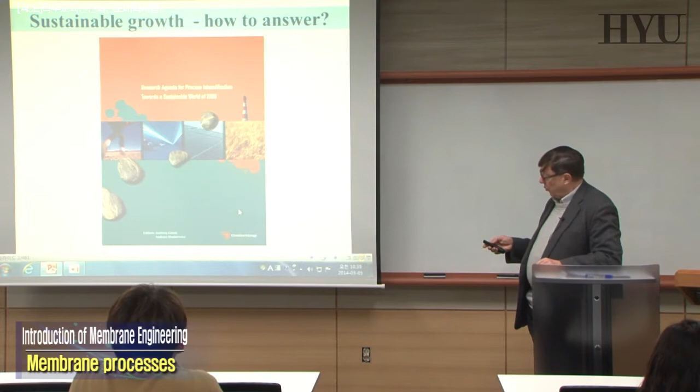Now, if you analyze carefully what we mean by process intensification, you will see in the next discussion that basically all the basic properties of the different membrane operations that we will discuss are quite consistent with the principle of process intensification. That's why we have to understand more and realize as much as possible and very quickly the basic principles of membrane engineering, which are consistent with the process intensification strategy.

Not all the work can be done using membranes, but the integration of membrane operations, sometimes new membrane operations, with other existing or new technologies is at the moment the best answer that we have for realizing our goal.

Now, process intensification strategy means that in process engineering, in all the molecular separations, remember, about 80% of the cost of any process is related to separations. So if you realize appropriate separation systems, you have quite a significant impact on most of the operations, chemical transformations, mass and energy transfer that we have in our industrial world. So molecular separation is a very important aspect of all this story.

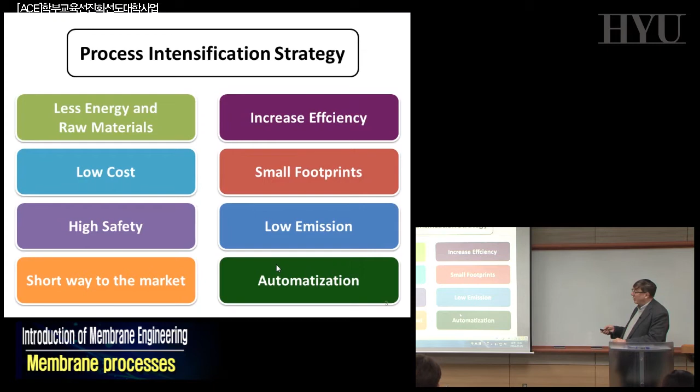So some traditional aspects are still present, such as energy cost or general low cost, but not only the traditional ones. New problems are present. That means a new kind of technology has to be invented or realized. The basic principles of process intensification, how to realize what we were discussing before, are not so easy. This final effect cannot be obtained just by making a small plant, with a small footprint, etc. It's much more than this.

For example, the principal objective that we have to realize, the basic principle of PI, is to maximize effectiveness of intra- and intermolecular events. So all the transformation has to be realized in a very efficient way, and that will avoid some side effects, negative phenomena, unexpected reactions, etc. We have to try to give each molecule that is going through transformation or separation the same processing experience to obtain a uniform transformation.

We have to optimize driving forces at every scale, nanoscale, mesoscale, macroscale, and maximize the specific surface area to which these forces are applied. This is directly related to the problem of transport across interfaces. A thin interface is the best way to try to realize this principle, and for us, thin interfaces are just membranes. So this is the direct relationship to the introduction to membrane problems.

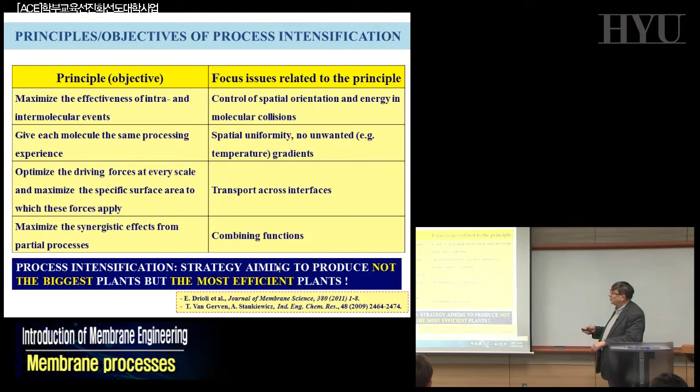We have to try to have spatial uniformity, so no unwanted gradients, phenomena of hot spots or negative side reactions, and we have to integrate different functions in the same process. So if you read this, you understand that it's not easy to realize this basic objective. To realize the process intensification strategy is not something that can be done in the short term or quite easily.

If you want to know more about these basic principles and what is going on today, there are different papers already published. One of the main protagonists of all these transformations is Professor Stankiewicz in the Netherlands at Delft University. They have an institute on process intensification and process engineering, and a lot of work is done there. And we collaborate sometimes together, by the way.

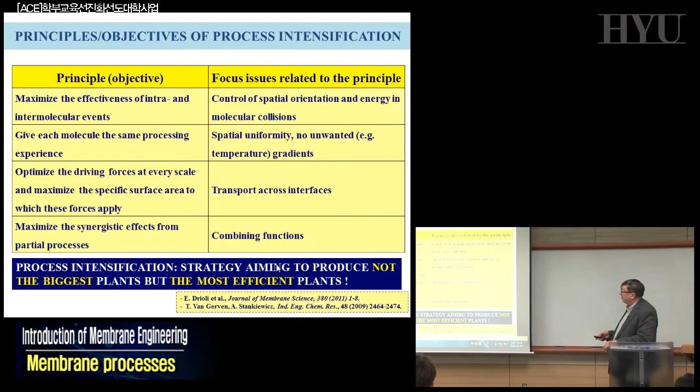If you are able to do this, the way to try to realize in perspective all these basic principles is to redesign all process engineering, all industrial processes basically, introducing new molecular separation units. Most of the more traditional ones today are not consistent at all with the basic principles that we were showing before. Years ago it was not important. Today we have to cancel traditional filtration systems, traditional processes such as sedimentation or cyclones, etc., because they are not consistent at all with process intensification principles. And so new molecular separations are important.

We have to realize what we call a new catalyst design, not just new catalysts, not just the chemical part, but today what is important is the catalyst design. That means using your catalyst in the most appropriate form to realize the basic aspects of PI. So catalyst design, which is directly related to the utilization of new kinds of chemical reactors, which we call more and more membrane reactors today, is another quite important part.

We have to design new unit operations for mass and energy transfer between different phases. Again, most of the ones that we are using traditionally today are not consistent with the basic requirements. So we will talk about membrane distillation, which is nothing more than normal distillation. But normal distillation today has been realized by creating a big distillation column, this long column you see in any industrial plant when you visit, with evaporation and condensation in thousands of different plates.

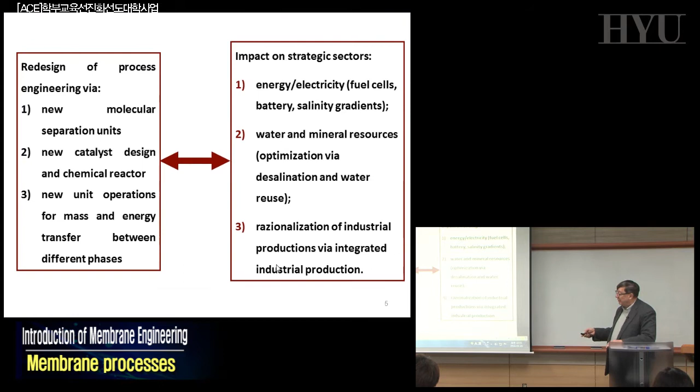Seawater is not available. We cannot drink seawater. We cannot use seawater in cooling towers or industrial applications. So we have to purify the existing water. We have to distribute and organize the water system much better than in the past. That can be done with membrane systems, and we will discuss this. And in general, we have to rationalize any industrial production by integrating different new unit operations, one of the basic requirements of the process intensification strategy. So this can be quite interesting.

And in fact, if you look at how to realize all these things, you will see that all the membrane technologies that we will discuss, reverse osmosis, ultrafiltration, microfiltration, electrodialysis, etc., are technologies providing quite interesting opportunities to redesign most industrial production in a much better way in terms of cost and environmental impact than in the past. And they are becoming much more acceptable, for example, as concerns environmental impact.

Membrane operations, remember, are not just separations. Traditionally, membranes were considered a kind of filter, eventually a molecular filter. But they are not just filters, not just molecular separation, much more than this. They are for sure quite interesting molecular separations, which account for about 80% of the operating cost of most industrial production, so very important. But they are also able to improve energy and mass transfer, energy conversion, new biomedical applications, etc.

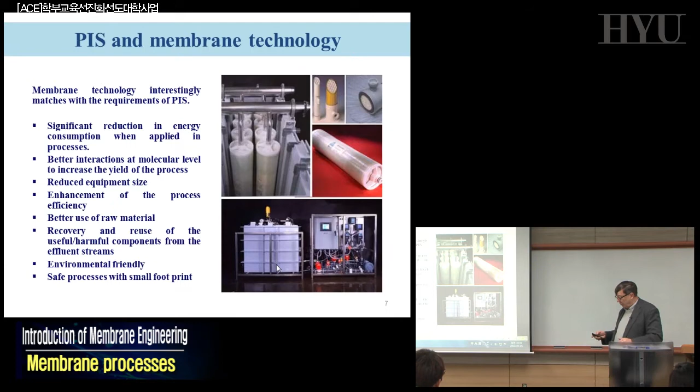There are operations today where in a single plant you have to install something like 3 million square meters of membranes. Huge amount of membranes in a single plant, 3 million. The amount of polymer we are using in some plants is of the order of 400 tons of polymer to produce the membranes necessary for a single reverse osmosis seawater desalination plant. Big amount. The largest plants in the world today are based on membrane operations.

Some typical examples of success and confirmation of the hypothesis I was making today are here. In desalination, reverse osmosis, RO is the acronym for reverse osmosis, is a system which in terms of energy consumption has an efficiency of a factor of 10. So you are reducing by a factor, not percent, of 10 the energy consumption compared to the thermal approach, traditional distillation.

In terms of membrane bioreactors, as I was mentioning before, municipal wastewater treatment, you have systems which are 5 times more compact than the traditional large activated sludge plants. So you reduce the footprint by a factor of 5. In some membrane reactors, chemical conversion, the conversion factor is 5 times higher than traditional reactors for the same reaction.

So these are already examples of success, of results already obtained in the last few years. Keep in mind that in membrane engineering everything started in the late 60s and 70s of the last century.

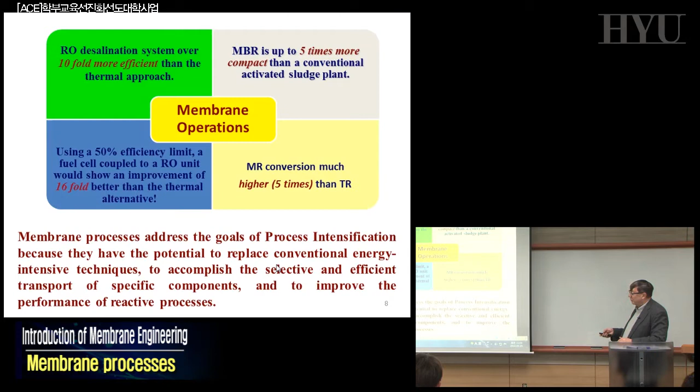Some market trends, what is happening in real life: you can see here, for example, in water, membrane technology is the most interesting, fast-growing technology today. And you have a lot of applications in water, with a market that concerned 2013, that means last year. You can see here we are already talking money in terms of billions of dollars. This is just the cost of the membranes. If you are looking at the cost of the system where membranes are installed, you have to multiply by 6 or 10. So the market of the past years is already of the order of tens of billions of dollars for the systems, just in water.

And water here means, you can see, just municipal water treatment, essentially just reverse osmosis, and different numbers you can see here. The installed capacity in the past years was already about 65 million cubic meters per day of water produced. These are interesting numbers because we will recall this number in the next discussion, because if you are producing 65 million cubic meters of fresh water per day, you have to remember what is happening to all the chemicals that you extract from the water.

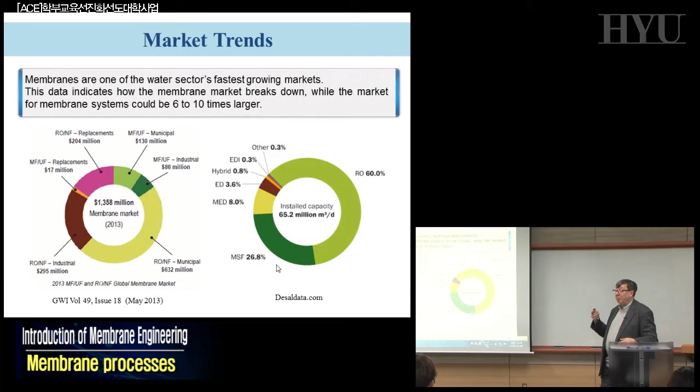And this in the past was not a problem. A small amount you were putting back in the sea or underground, or distributing on the ground itself. No more possible when you have big numbers like this one. You're producing water, yes, it's nice, but you destroy the environment if you don't take care of the brine disposal. What to do with all the salts that we extract from the sea, for example? And today we have to invent how to best utilize this brine. That's a big problem.

But if you can see here, this is about all this production. Basically 60% is reverse osmosis already. MSF, the traditional thermal system, was 90%. When I was a student like you, this number here was 0.5%, was nothing, just the first plant. Today it is more than 60, and today is already approaching 70%. MSF years ago was 90%, 95% and more.

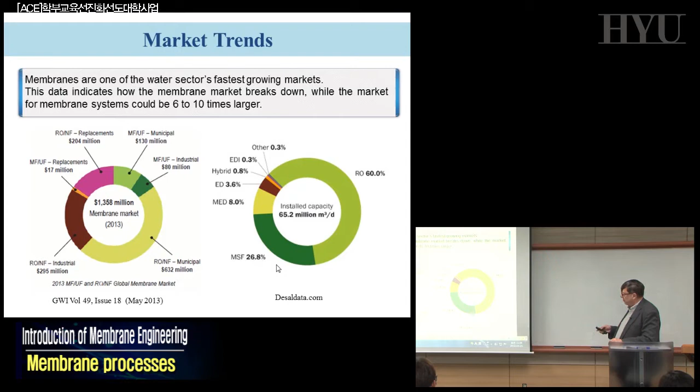Today it is disappearing, it is only 26%, and basically only in one country, Saudi Arabia, for different reasons. MED is 8%. All the rest are hybrid. When we say hybrid, it's just reverse osmosis eventually with electrodialysis and others. So membranes are just becoming the dominant technology.

Other sectors are less familiar maybe to you, but for example, in the food and beverage industry, membranes are becoming more and more strategic operations in the separation, purification, concentration of most of the foods and beverages you have on the table today, all around the world.

You can see here what is happening and how this is growing over the years, and this is already 2012. But if you go back here to 2000 or 1980, this value here was approaching zero. And in a few years, in 12 years, you see the growth, and this growth is still going and probably will be 100% in the short term. That means when you drink your orange juice or milk or any produced food, membranes are a part of the transformation process in the production line, more and more.

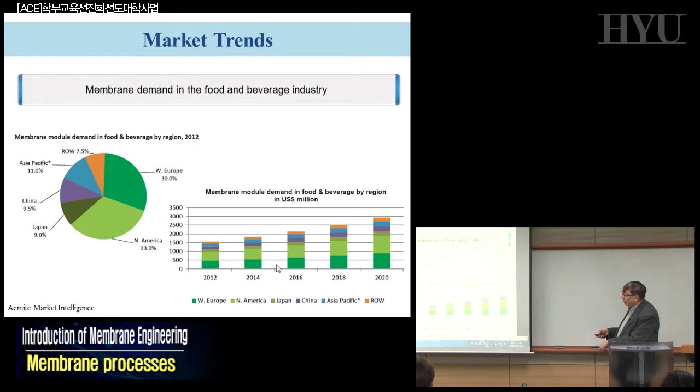And that is basically, you can see, all around the world, particularly in the United States, in Europe, and also in the Asian countries, more and more. For what concerns the market, we saw these numbers before already, and that is the transformation that is expected.

Already now, you see the amount of seawater reverse osmosis. The seawater reverse osmosis is going up and up today; it is approaching basically 80% of the total market a couple of years from now. These are the expectations, what is going on.

And MSF, that years ago was the only system, is basically going to disappear. MED is still a little bit present, but these traditional thermal systems will basically disappear in 2 or 3 years from now.

Still, at the university, except in some cases, very few classes are given in which people are told: be careful, traditional distillation will disappear. Today everybody is learning about distillation. Very few are learning about membrane systems.

But in real life, if you go outside the university, all around the world, in Europe particularly, people don't realize that 80% of desalination is no longer distillation, it's membrane systems. So we have to speed up the introduction of this new concept in most universities all around the world.

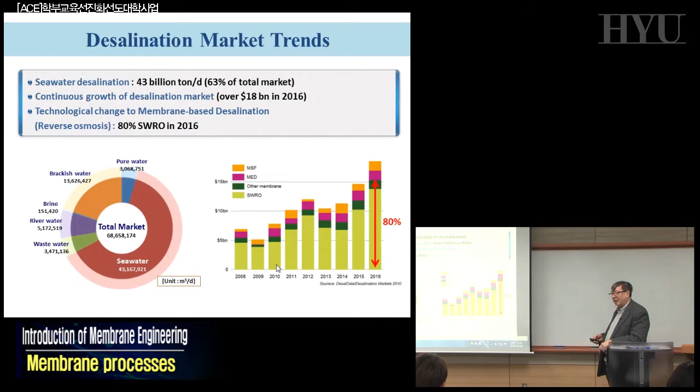That's why if you go today to China, Korea, Japan, Europe, classes on membrane engineering are sponsored by the local government. The European Union is creating a doctorate only on membrane engineering, sponsored at a European level, because we have to learn much faster than traditional methodologies, because that is what is happening today. A couple of years, 80%.

To give you an idea of what is happening, here are some of the world's largest seawater reverse osmosis plants installed a few months ago. This is the third quarter of 2013. This plant is already in operation; 100% operation started in November, if I remember. This is a plant of more than 500,000 cubic meters of fresh water per day. So these are the largest plants realized last year.

These plants are already obsolete. I will show you later that these plants are already old because the new plants are coming with double production, 1 million, not 500,000, 1 million.

This one has been installed in Israel a few months ago, and here you can see they have quite a small footprint. It looks like a big number, but it's very small for a production of 500,000. If you want to do the same plant, not with membranes but MSF, it will be 350,000 to 400,000 square meters, much, much bigger than the one you can realize with membranes. And the same for the cost.

The water cost for this kind of unit is of the order of 0.58 dollars per cubic meter, for 1,000 liters. Realize how much you pay for the water you drink when you buy it in the supermarket, where a 1 liter bottle sometimes costs you the same price, or, if you buy it in the hotel, double this. This is the cost for 1,000 liters.

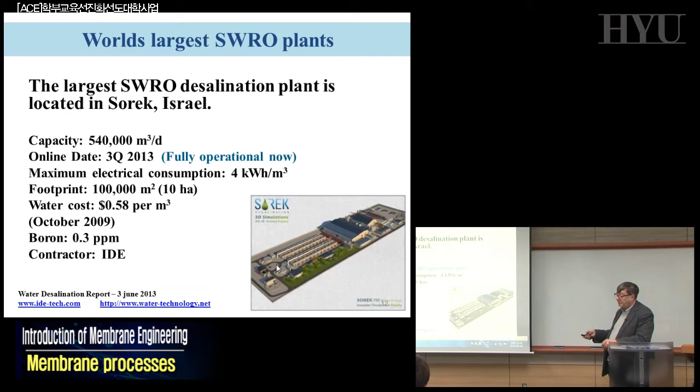Other plants, same story. That is the second largest plant in the world, in Algeria. It just started, also in the third quarter of last year, and this is what it costs. You can see here, $468 million, a single plant. So when you make this investment, you must be sure that the system is working. And this is again 500,000 capacity, and it is already in operation.

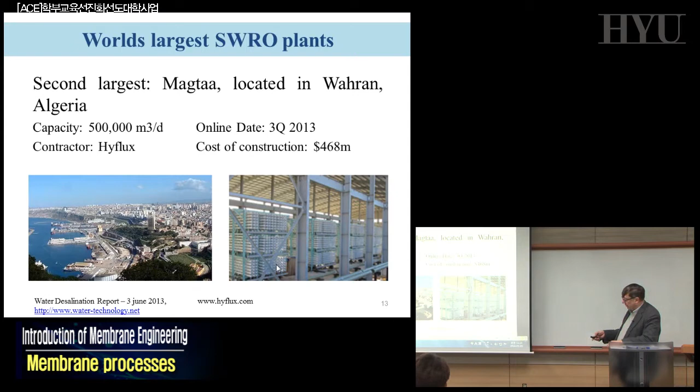If you go to China, not too far from Korea, if you fly one hour, you will see what is happening in China. In China, they are starting to realize not industrial parks, as you have in the United States or in Europe, related to electronic technology, say the IT park or biotechnology. They are realizing the industrial membrane park. The Chinese are assuming that in the future, membrane technology will be a very powerful core technology covering everything you will see here. And so they realized this near Nanjing.

Nanjing is a very industrialized city. And six months ago, they started operation of a membrane science and technology industrial park. They have about 60,000 square meters of installation already there, most parts still empty because everything started a few months ago, in which for the future they will concentrate industry, university, research centers, working together on everything on membranes.

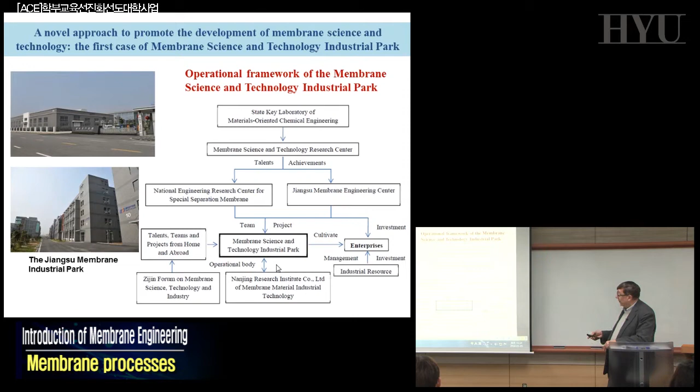And you will see that there will be enterprises and venture capital investment, all in this area, and not for doing one process, not desalination, etc. They do everything. They will work on the CO2 problem, capture and storage. They will work on the water problem, in metallurgy, in pharmacy, in food, in petrochemical, electronic industry. So they are assuming that this kind of technology can cover basically all the problems that we have today, that we were discussing in process intensification.

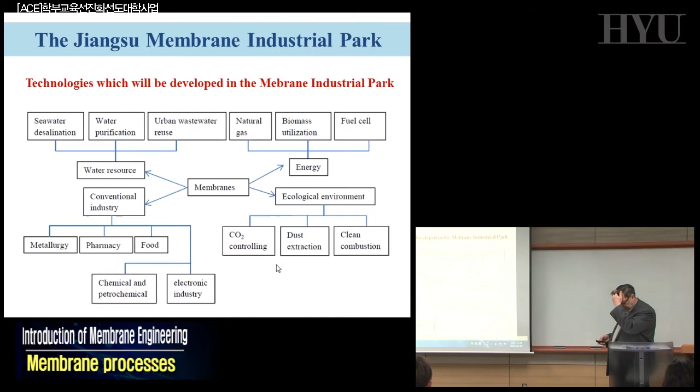Quite interesting. We must be careful, we have to do the same, otherwise we will be dependent on what they are realizing. This is in Nanjing, the Jiangsu Membrane Industrial Park. Another one, not yet realized, is under construction in the north of China, in Gansu province, in a city called Lanzhou. Lanzhou is one of the areas that the Chinese government has identified as an interesting one, and they are realizing already number two, to my knowledge. Maybe there is number three, number four, I don't know, but already two industrial membrane parks are present, one already in operation, the other one coming very soon.

As we said before, the reason for being involved in membrane engineering is that at least some of the most interesting problems that we have today for industrial development can be approached and solved, hopefully, using membrane operations. And these are some of the cases. Now, we have on Earth today three major big problems. We have more than three, but three are the most interesting. As you know, related to the total world population, which has been increasing significantly in the last 50, 60 years, this increase of the population has produced some problems. One is the water problem, which everybody is familiar with.

We have a reduced amount of purified water available for human beings, because the number of human beings is so big that we need more fresh water to satisfy them. And the same is the problem of global warming, which is related, and the same is for energy consumption, which is related. But there is one problem that maybe not everybody is familiar with, and this is number three: depletion of raw materials.

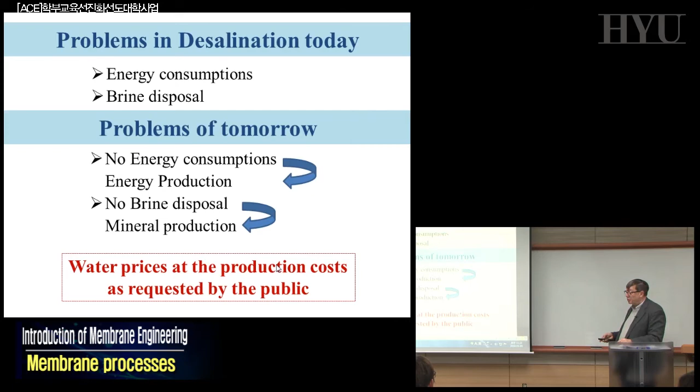So that can be one hypothetical future scenario, if we are able to create a new technology in which we can realize energy production and raw material production combined with desalination. And that is something that is happening. You will see that in your country people are already looking at exactly this strategy in some of the projects. In the last years, in Europe, in Korea, in Japan, there have been big multinational research programs trying to solve initially just the water problem, water stress.

MEDINA, I directed this project for about 5 years in Europe. It was one of the largest integrated membrane operations for fresh water and raw material production in Europe. In Korea, there was SEAHERO number 1, but now we already have SEAHERO number 2. You will see that SEAHERO number 2 is exactly reproducing what I was mentioning before. And in Japan, the Mega-ton project; we saw before that last November big plants started operation, and these big plants are 500,000 cubic meters of water per day.

In Japan, last November, there was already the presentation of the results of Mega-ton, where the size of the plant is not 500,000 but 1 million cubic meters per day. That means the plants we saw starting last November are already obsolete, already old. The technology gives you the possibility to produce 1 million today, which means 2, 3, 5 million tomorrow probably. In a few months, all the big plants installed are old plants, because this can be the new one available today. Quite interesting, because these big programs are very much related to the principle of process intensification.

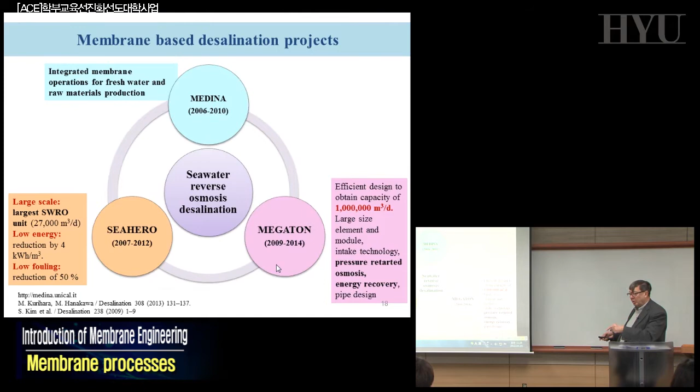You see here that in Mega-ton, pressure retarded osmosis is part of the process, to produce energy combined with the production of fresh water. And you will see that SEAHERO is already working on technology that will permit not only producing fresh water on a large scale, millions of cubic meters per day, but also producing energy and raw materials for all advanced industrial applications.

Medina was a process in which the traditional reverse osmosis, already, as I was mentioning, a dominant technology, was not anymore by itself. Reverse osmosis here is the core of the system for water production, but all the pre-treatment to reverse osmosis and also all the post-treatment to reverse osmosis has been suggested already as membrane technology. So this is a typical example, very well consistent with the process intensification strategy of integrating different operations in the same system, all related to the same technology, membrane technology, membrane engineering, where we have microfiltration, ultrafiltration, nanofiltration to pre-treat instead of coagulation, sedimentation, sand filtration, etc., to produce the water to go to the RO.

But the most important aspect was here, because now still you have a relatively low recovery factor. Recovery factor, the amount of water produced from seawater, in normal distillation, MSF, is about 20–30% at most. In reverse osmosis alone it is going to be about 50%, 55%, much better than MSF. But we want to make much better than this. We want to have 90%, 95%. You can do it if you just integrate on the nanofiltration concentrate, on the retentate, and RO, membrane distillation, membrane crystallizers. New technology, quite consistent with the logic of PI, process intensification. And if you do this, you can realize what we call roughly zero liquid discharge.

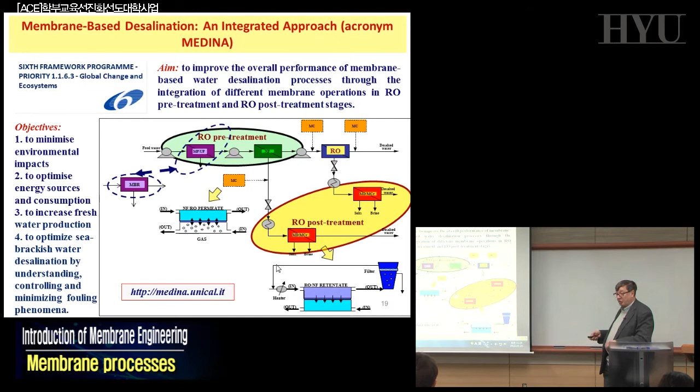That's why, if this is true and can happen, we have to learn which technology can do the job. What is membrane distillation? Most of you probably, except the ones already attending the course last year, don't know about membrane distillation. What are membrane crystallizers? What is MBR? MBR here can be a better way than just this membrane technology to realize a pre-treatment appropriate for RO. And this is something that came at the end of the project. This is a typical example of what can be done.

Now, if you go to the other project, this was done in Europe, but here Megaton, the one in Japan, ended last November and now is continuing for big plant realization. If you want to know more, check about Megaton. Most of the results are available today. You will see huge plants that will change our way of living, because these are plants related to the concept that in the future we will have huge cities, as Seoul already, but bigger than this. Today we have 3, 4 mega cities around the world. In a few years we will have about 50, 60 megalopolises, cities of 30 million people, 25 million people living together, which means all the systems for water distribution have to change completely in this logic. That can be done using this kind of approach. You can find data, I will show you some of them.

But interesting here already, when Megaton started, the concept that you can produce energy, osmotic power generation, combined with desalination was already present. Very important one. And that's been already related to the realization of huge plants, which means that the reliability, the trust that the engineers and people have in this investment is very high. When you realize plants that cost you billions of dollars, a single plant, it means that you know it can be done. Otherwise, you don't take any risk of this size.

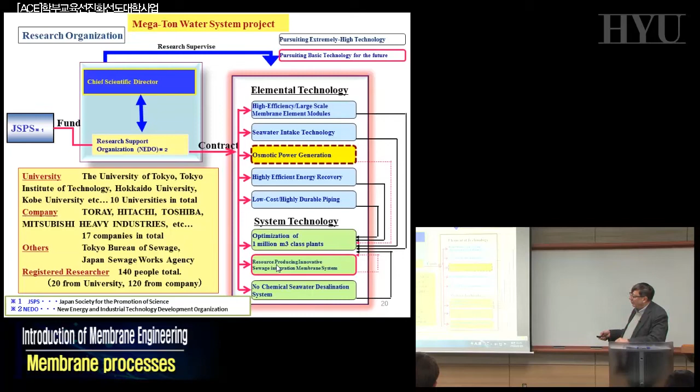And this plant was optimized for the 1 million cubic meter class, all standardized plants of this size. And it can be bigger than this in the future. And there will also be some other innovative ways to produce energy and eventually minerals coming from the same concept. You can see here the whole industrial world in Japan was involved in this project, not only one, but Toray, Hitachi, Toshiba, Mitsubishi, etc., they are all involved in this kind of story.

But if you go to Korea, that is familiar to you, you know what I'm talking about. Maybe you're not aware that here in Korea they started, roughly in the same year, a very similar program to Megaton and to Medina, by the way. We were working, networking all around the world. I was a part of the Megaton, for example, in the advisory scientific council. I was sitting there, and very well related to this plant, this process also.

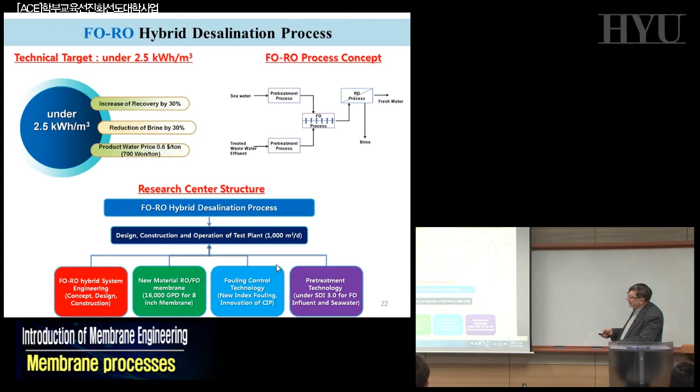But what is happening today is quite interesting. By the way, this has been quite successful. During the process, they were introducing some new concept, forward osmosis combined with reverse osmosis, and we will discuss what is forward osmosis, what is reverse osmosis, and that was some innovation coming across the study.

But if you go to see the end of the story, the concept, first of all, of this hybrid desalination process for energy and resource recovery, not for producing water, but for energy and resource recovery, became part of the vision and the concept of the SeaHERO program. And now that they are developing more in terms of research, in the next step, you will see here that membrane distillation and membrane crystallization for RO brine is a part of the SeaHERO number 2, where about $70 million are going to be invested.

So the same concept I was telling before, that we were assuming a little bit romantic and not easy to realize because too many transformations in one. Here they are. This will be the work that some of you, when you will be out from the university, will have to carry on at industrial level, because that's what in Korea the research center structure is. This is the point: extraction of valuable resources from RO brine. Instead of talking about brine disposal, they are talking about how to utilize the brine at best using this kind of technology, the one that we will discuss here, and energy, etc.

Reverse electrodialysis and pressure retarded osmosis as basically part of the desalination. So desalination is no more just desalination to produce more water and to sell bottles of mineral water at high cost. It's the way to produce minerals, to produce energy, and eventually also water. But water is becoming the less really interesting aspect.

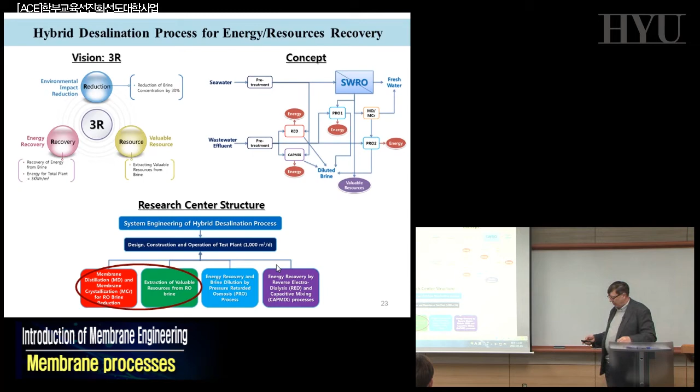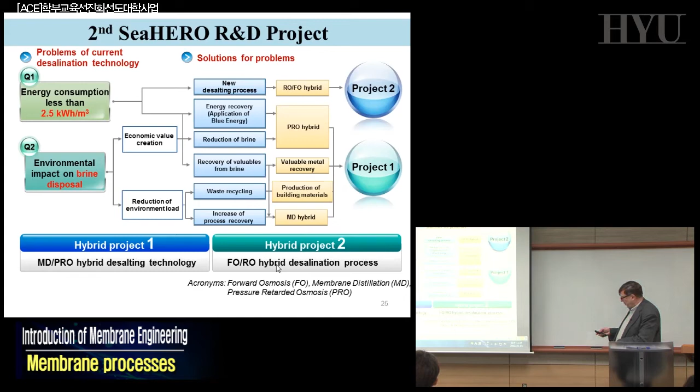Just to show here that now you have SeaHERO number 2, and SeaHERO number 2 is subdivided in all these aspects I was mentioning before. You have already PRO hybrid, you have RO forward osmosis hybrid, you have valuable metal recovery, project number 1 already in progress, and you have production and different other aspects of this. It's not just the minerals, but you can have also building material and hybrid systems. And what is interesting for you is that it is the same kind of logic.

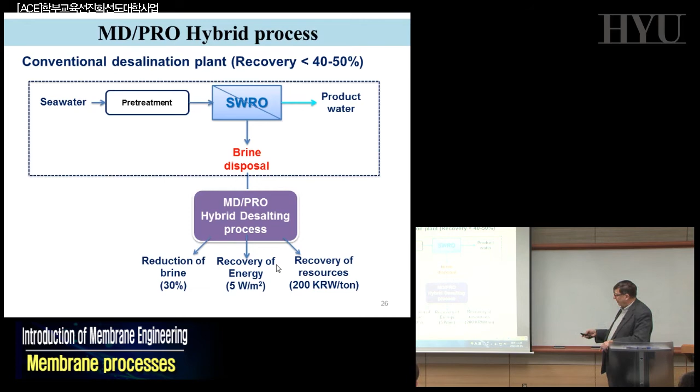Also, you have membrane distillation combined with PRO. We will discuss these things because you can see in SeaHERO this concept is very well designed, very well present, for reducing the brine, for the recovery of energy and the recovery of resources. So this is a slide telling that, don't forget about water, energy and raw material, it is SeaHERO now. It's becoming a very interesting aspect of SeaHERO. And here it is, the same number.

What is interesting for you is that number 1 is already working from 13 until 18, 5 years, with 26 billion Korean won. And number 2, I think, is starting now. This one is already running. This one is starting. And this is again forward osmosis RO. And this will be starting this year, 14 to 19, 32 billion. So about $70 million, totally devoted, as you can see, not just to water production.

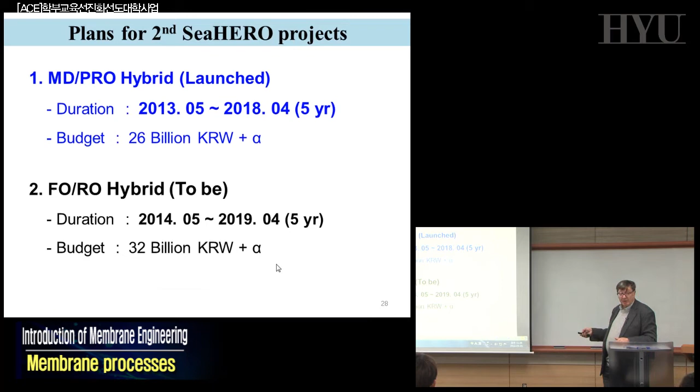Well, the same plan that we were calling for water production, but now it's no more water production, it's energy and raw materials, exactly as we were discussing before. That's quite interesting and will help. Because what is happening here, I was mentioning that we are producing today with the existing plants, not the 1 million or half a million, this was the previous one, already 65 million cubic meters per day. Now, if you calculate this, realize that on the back we are also producing 37 million cubic meters of brine, of minerals.

Forget about the water, because now from the RO brine, we can do different things. First, we can still produce water from the brine by membrane distillation and membrane crystallization. But from the same brine, using membrane crystallization, we can extract minerals. And we will see minerals much easier and in a better way because this brine is very clean. It's very well pre-treated for going to RO. So it's not the kind of brine that is in solar ponds, etc. Very different, but quite interesting. You can have a polymorph with special habits in this way.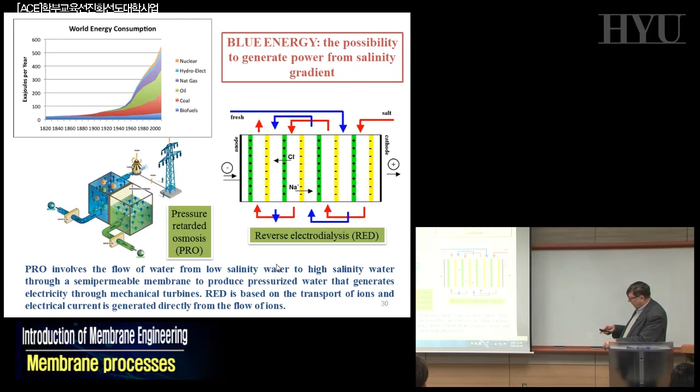Today, basically zero. We have 3 osmotic power stations already running in Norway, in Europe, in the Netherlands, and one in Oman, in the Middle East. Small ones, but running and showing the potentiality of the 2 systems, reverse electrodialysis that we will discuss, and pressure-retarded osmosis that is very similar.

Interesting just to remember, we will discuss again, but if you enter in this logic to have a membrane crystallizer on the concentrate of RO, so from RO on one side you go out with fresh water, and all the concentrate brine disposal is becoming a membrane crystallizer. And if you do this and you look at what is today in the water, concerning magnesium, magnesium is a strategic element already now extracted basically from seawater. In China, all the magnesium is coming from seawater, basically the same as in Israel, where it is from the Dead Sea.

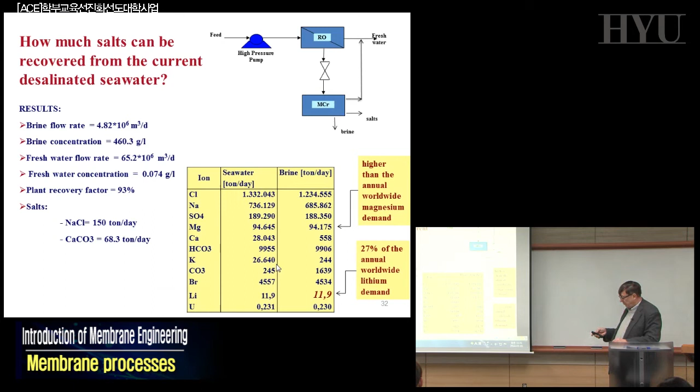You can double, if you now take this amount of salts present in the brine already existing today, you can extract basically this number, tons per day, and you double the production of magnesium on Earth just using the magnesium present in the brine produced by the RO plants today. With lithium, which is becoming one of the strategic elements for the future related to the lithium battery and similar, you can increase the production of lithium by about 30% just by extracting the lithium from the brine that we have today. So quite interesting if you can do this.

And so you will have at the end that in your system you can have energy and production. This slide is just showing you that the system for energy production, by the way, is not just on seawater. There are some hypotheses to produce blue energy also using a biological system as feed water. And Yamamoto, the inventor of MBR, is suggesting that we don't look only to seawater, but any other feed water can be utilized with the same basic concept to produce blue energy on one side and to produce brine on the other one.

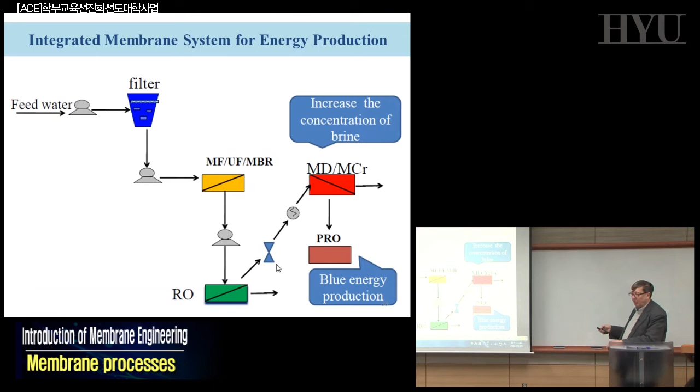If you speak with philosophers of old tradition, not membrane people, not engineers, but people who are working on the modern, late modern, postmodern age to the sustainable world for the next 10 billion on Earth, what is coming out is a guy called Professor Tambo, a very famous professor in Japan. He was talking about the water district, and this means how we have to redesign all the water systems worldwide in front of what is transformation, a big city of 20, 30 million people, and different considerations about the economic system rather than the ecological one, etc.

But for our interest, membrane technology, reuse and desalination are key to establish the system for the future. More than this, when discussing the postmodern period, that means the last 100, 200, 300 years, he is talking about all the problems of water quality, the amount of energy necessary and how to protect the diversity of the system. So conclusion, various membrane technologies are a key to make up the postmodern urban water metabolic system, how to treat all the municipal and wastewater treatment in the logic of the postmodern period.

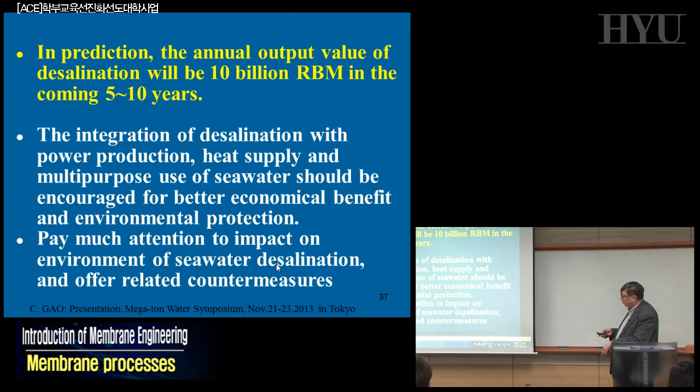That was very surprising and interesting for us, for membrane people, because we were not expecting such a strong statement from people who don't know too much about membranes, but when they are now analyzing the system, that is the way of doing. And that is what they expect in terms of the new operations that will be done, related to desalination, not only desalination of seawater I was mentioning, but also in other situations such as municipal wastewater treatment. And those are some of the examples that all these people in Tokyo were giving.

And also interesting, this is not only in Japan, this is what is happening in China. China doesn't have a very well organized system like the Japanese or Korean, so they don't have yet a national program, no SEAHERO, no Mega-ton, no Medina for the moment. However, they are analyzing the system exactly in the same way. Through desalination, they are no longer looking at desalination only for producing water. Desalination for them is a way to produce electricity, to control the electrochemical, petrochemical world, and to work on concentration and drying problems, and all the chlor-soda plants will be going through this kind of system.

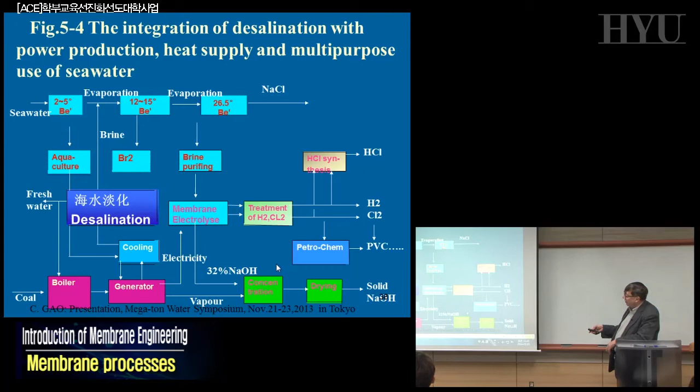So basically, again, desalination on one side is involved in fresh water production, but on the other side is involved in many other basic problems, from aquaculture to brine purification, for water production, for sodium chloride production, etc. Same concept also in China, starting now. Not as well organized as in other countries, but the same story. Okay, this is what we were considering already.

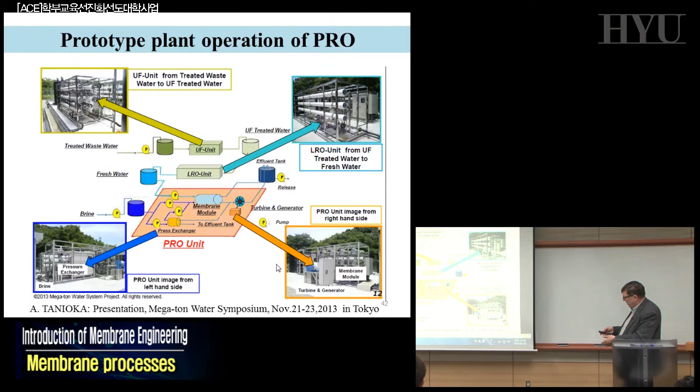Keep in mind that when you realize, for example, one of these blue energy processes, pressure retarded osmosis, this is again related to Tanioka, who was talking together with Tambo. These are becoming very flexible systems that are changing completely our way of living, because you can have a system for treating and producing fresh water combined with pre-treatment, combined with energy production. So this system will change completely also the architecture and the scenario of our cities in the future, if these things are realized.

Some of the numbers, to justify what we are talking about: the power density that you can realize with pressure retarded osmosis is already now, as of November of last year, of the order of about 21 watts per square meter. If this number is real at industrial scale, blue energy will become very popular shortly. Today, most people working in reverse electrodialysis are producing 4, 5, at most 8 watts per square meter with the existing membranes and technology. The Japanese are already offering, with one of their plants, hollow fibers at 21 watts per square meter. Nobody is investing in huge plants on this number because we don't know, but some people are saying they have the fibers for doing this. If this becomes real, a lot of problems will be solved.

We will not discuss too much about membrane production. Professor Young Moo Lee will discuss membrane production after the midterm. However, I'd like to mention already now that most of the membranes available today are not yet appropriate for doing what we are discussing. For example, if you want to realize SEAHERO, you need new materials, because SEAHERO assumes that you realize membranes, not only the hydrophilic ones that you use in forward osmosis or reverse osmosis. You have to realize membrane distillation, membrane crystallizers, eventually membrane condensers. In this case, you need membranes very different from the ones for reverse osmosis. You need hydrophobic microporous materials.

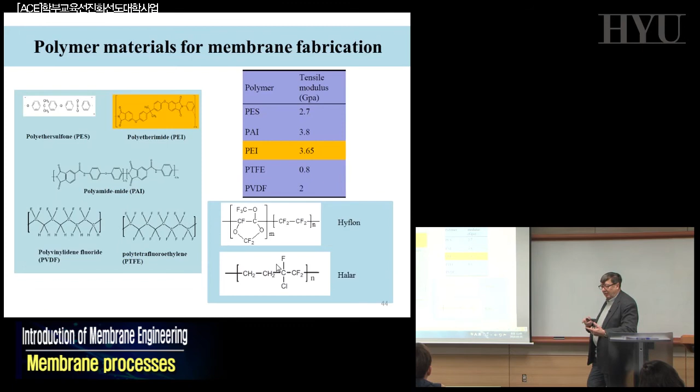And not only the traditional ones such as PVDF or Teflon, polytetrafluoroethylene, but new materials are today for the first time under analysis to become part of this millions and billions of dollars market that we showed before, such as Halar, Hyflon, etc. Polymers very unknown to most of you for sure, and this will be one of the areas where people will work a lot.

Until now, we have been talking of this integrated membrane system related to water, and we will discuss a lot to justify your necessity to learn about RO, etc. But keep in mind that it is not only water. This is the case of biofuel production.

Biofuel production is one of the other areas of big interest, from biomass to arrive to some biofuel, not just hydrogen, but also some liquid hydrocarbons, which is a way to solve the problem of the storage of hydrogen. Hydrogen you produce, but if you don't use it immediately, you don't know how to store it. You can produce from biomass some biofuel, which can be just a liquid hydrocarbon, so you solve the problem of storage of hydrogen, much less dangerous.

Also, the production of biofuel is suggested today as a nice integrated membrane operation, where you're going to use submerged MBR, membrane bioreactors, in most of these steps, and all the downstream will be just nanofiltration, reverse osmosis, membrane contactors, and also the final formulation of these products is going to be through membrane emulsifiers, etc.

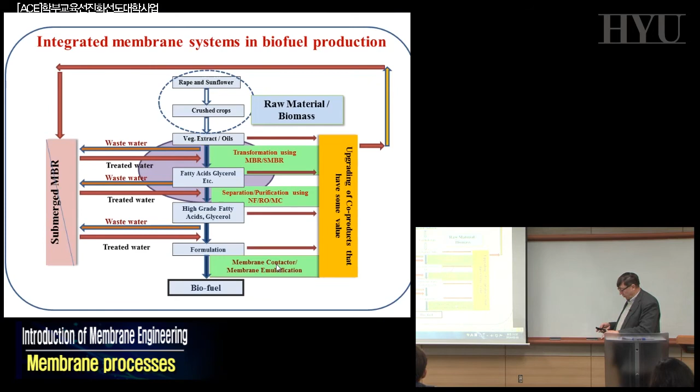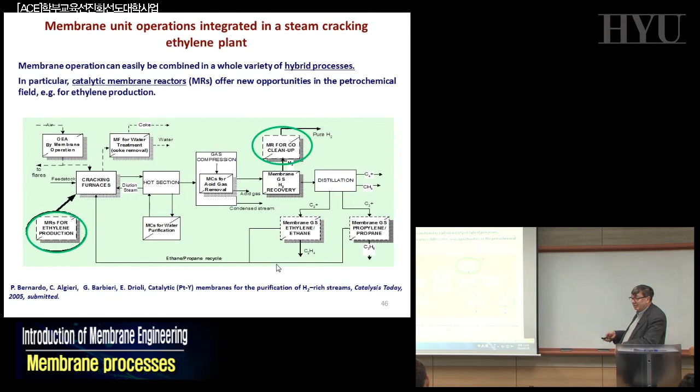And the people producing this, some is us, but these are the people, this name here, some of you know. Anyway, these names are the people producing huge plants in the world today, not just professors, but the ones that are going to realize big plants are now working, not for tomorrow afternoon, but for the future, exactly on this line. So water, biofuel, ethylene, etc., are becoming part of this.

We have no time, we will discuss later on, but for doing this, we have to learn not only about traditional membrane operations, but also about membrane distillation, membrane crystallization, membrane emulsification, and you will see also membrane condenser. That is a new process coming now. If you go in the literature, you will find one paper, two papers soon, on new process operations, all consistent with the logic that we have been discussing before, process intensification.

Just the case of membrane distillation: distillation is one of the oldest understood operations that people realized a long time back. You can find evidence of solar desalination 2,000 years ago. People were already writing and designing some of these things, in which we have what is called the natural hydrologic cycle. That means we have water. The water evaporates normally, it creates a cloud. From the cloud you have rain, going back underground, etc. This is a natural cycle.

Keep in mind that if you analyze, and you are here, and you are drinking some of this water or using this water, if you mark this water, the same water will come back to you here in about 10, 15, 20 years. So the reuse of water has always been present on Earth. Long term, 15, 20 years of time before you can use again the same water you have been using today.

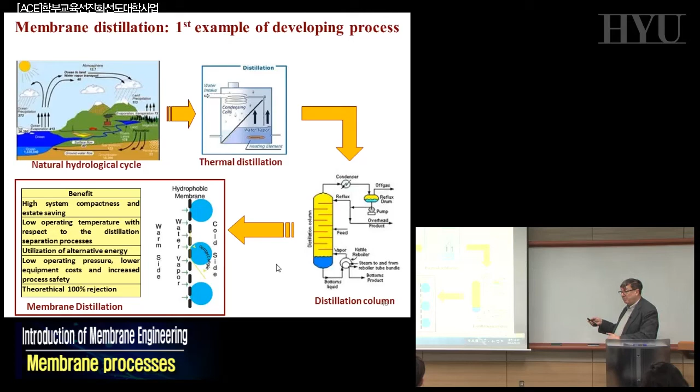This is quite interesting, and that is one of the processes where more and more, including if you go on the 10th floor here, people are working to improve membranes, engineering of this kind, to make something that has always been done in the last 2,000 years and more. So that's a typical example of what we mean by new unit operation today. How to realize the same basic concept, the same basic idea already present, but with an engineering much more appropriate in the logic of PI.

The same story is when you are talking about crystallization. If you know how to handle membrane distillation, you will realize that you can concentrate your feed at very high values. There's no dramatic flux decline, as in reverse osmosis. There is no concentration polarization effect controlling the interfacial phenomena. So you can concentrate and realize a supersaturated solution on this side with no flux decay that makes the system not possible.

And if you do this, this can be an interesting way, and you can also separate the crystals continuously as they form in such a way that you don't plug your membranes, and you can realize quite interesting systems. And if you do this, you learn something. You learn that it's not just an evaporation here, it's much more than this. You evaporate for sure, but also the influence of the chemistry of the polymer you are using on the activation energy of the process is very important.

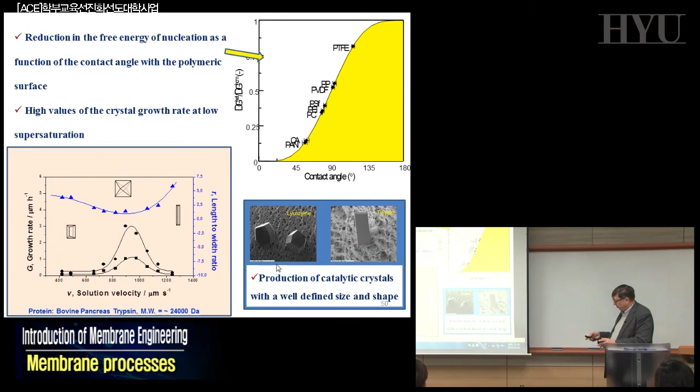You can change completely the kinetics, the activation energy, moving from Teflon to acrylonitrile to PVDF, etc. So this is not just an evaporator, it's a crystallizer with properties much better than any normal crystallizer, in which this kind of effect is not present at all. So if you understand this, you can produce interesting crystals for proteins, from salt, etc., and you can also realize selective polymorph crystallization.

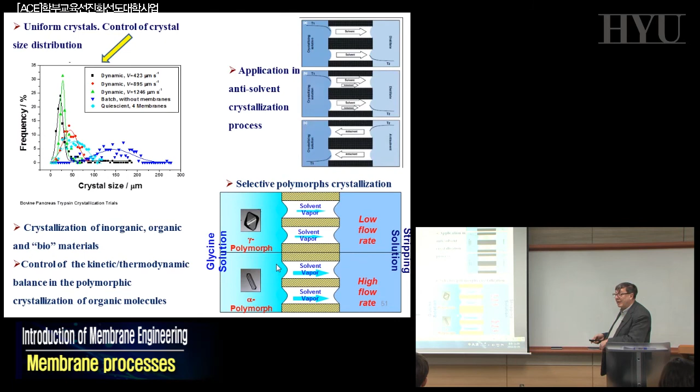That's why you have to learn about the membrane crystallizer, because it's one of the technologies that is changing traditional units. Crystallization is one of the most important basic unit operations in process engineering, but now it's going to change significantly. And if you go to the journal Crystal Growth and Design of the American Chemical Society, you will find the front covers of a couple of issues devoted to this new way to crystallize everything. So quite interesting. And you can also realize a membrane emulsifier, with the same logic, using hydrophobic or hydrophilic membranes and using this pore size distribution to realize a very uniform monodisperse emulsion.

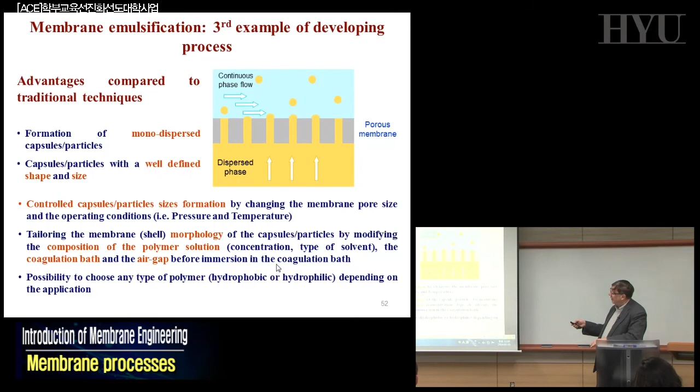Emulsion is the second final formulation of most of the processes that we have today. When you produce something, the final form of your production can be crystals or emulsion. When you are using your shampoo in the morning, or you give some food to the children, etc., they are emulsions. To produce emulsion is quite important, and today membranes are also controlling the way to produce emulsion, etc.

The last case I would like to mention, and if we have time we will discuss, is not until now realized at any industrial level, so it's just a new area of research. We were talking before about membrane distillation. That means if you warm up one side of your membrane, some liquid goes into the vapor phase, moves across and condenses on the other side.

If you are a smart chemical engineer and you know about the problem of condensation, gases in liquid, just the opposite, instead of warming up, you can cool down. You can decrease the temperature at the interface. So if you make the right calculation, you can condense. If you have supersaturated flue gases going into the sky, you can try to extract, to condense the liquid, the water, for example, by cooling down on hydrophobic microporous membranes. And that is what we call a membrane condenser. You have a retentate liquid and you have permeate gas.

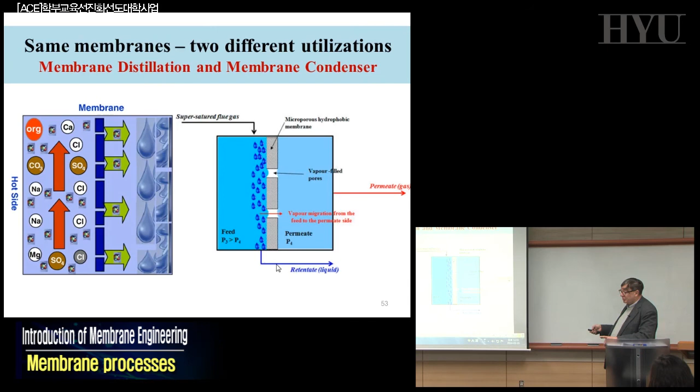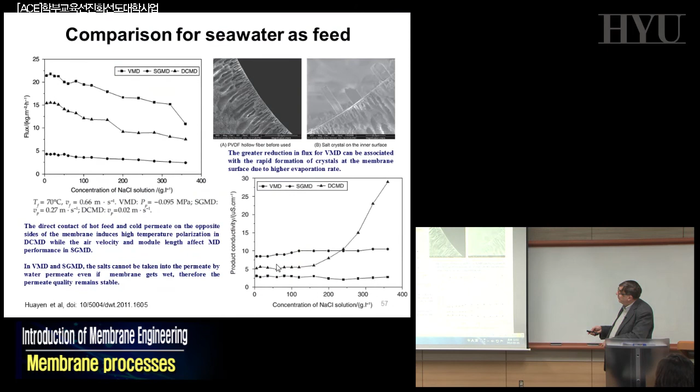And that can be quite interesting, because as in crystallization, you learn at the end that not only do you make the separation, and you have to decide how to make it, etc., but you can also increase significantly the quality of the condensation. Let's see if I have a slide here. We'll see again later on, but

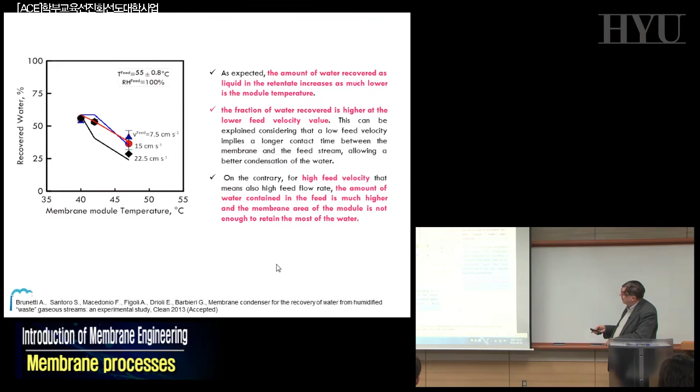you can see here, introducing some new parameters compared to a traditional condenser, that means changing the feed velocity on the membrane surface, you can condense your water, but you can change the level of contaminants that will be dissolved in the water that you are going to condense. Here is ammonia or hydrofluoric acid, SO2, etc. And this is impossible with a traditional condenser, and this is the case of SO2.

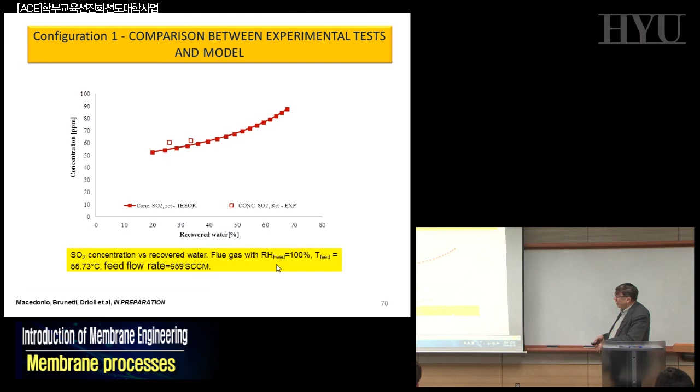You can see here, this is a theoretical prediction: for different levels of water you can recover, the amount of SO2 which is present. These are experimental results. So by changing the parameters controlling the condensation, you can decide not only to produce the water, but to produce water with a certain level of contaminants, can be SO2, can be ammonia, can be hydrofluoric acid, whatever it is, and in one step you kill two birds. You condense the water, but you change the level of contaminants present. Quite interesting and quite useful for different operations. Okay?

We can stop now. There are some more examples of what membranes are doing, but I think the intention was to justify why, for the next couple of months, we will discuss membrane operations, because as you saw, membrane operations can be quite interesting. The existing ones are already running at large scale, and in your country, people will invest. You will pay tax for making real membrane distillation, membrane crystallization to extract the minerals, to produce energy, and to produce fresh water. But in the future, more than this can be done.

New technologies are coming, so we have to learn what more can be done on the same line, to realize what has been done already and to develop the new ones. A typical case, if we have time we will discuss, is produced water. How many of you know what produced water means? Who knows about produced water? Nobody. This will be the biggest problem of the future. Produced water is all the water related to oil extraction. And you know, oil will still be, for many years from now, one of the big problems,

one of the sources of energy. Now, when you extract oil from underground, already now, for 1 barrel of oil you extract, you have to use 3 barrels of water, because you have to push. The oil is underground. A long time ago, the oil was appearing as a kind of lake on the surface, no more. Now the oil is down, and it's very difficult to take it out. It's becoming more viscous, deeper and deeper underground. So we have what is called enhanced oil recovery. You have to push water or CO2 underground to move this oil up. This is done with CO2 or with water, basically with water.

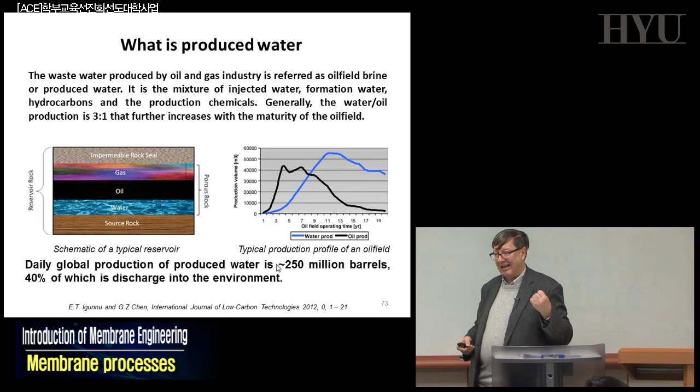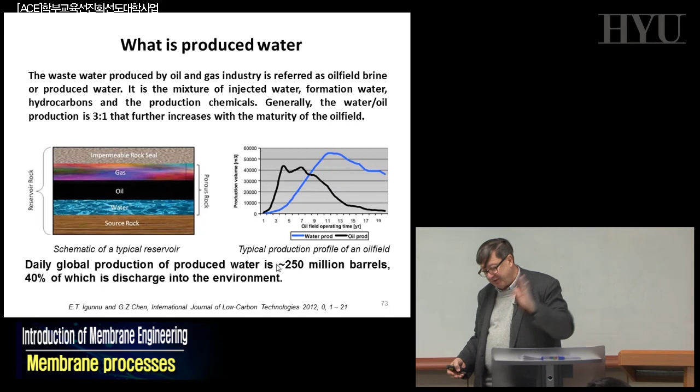Now this term, produced water, is becoming more and more popular. If you go on the web, click produced water, you will find a lot of work. And now, in the future people are assuming that they will extract shale gas in the United States of America or all around Europe. This shale gas is still a bigger problem. Shale gas is the gas that is entrapped in the fractures in the rocks, etc. Very difficult. You have to push more. So more water, more gas. So this is becoming bigger and bigger.

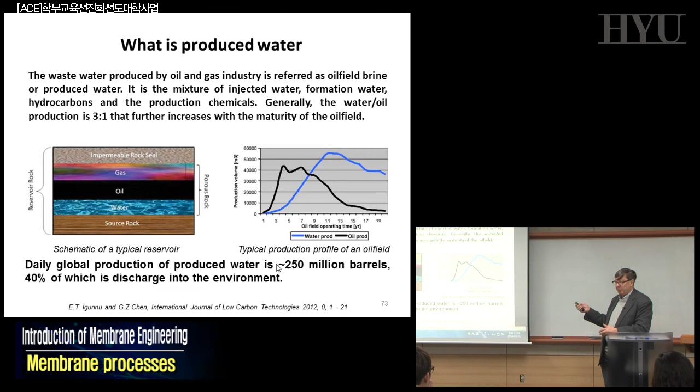So we have to find how to solve this problem, to reuse continuously the produced water in the field, offshore and onshore, etc. Membranes will be the way to solve it. So there will be new polymers, the one I mentioned also before, just developed and just studied for this kind of application. So this is another case that we will discuss as a typical example, and produced water is becoming an area where new membranes are also necessary. The existing ones don't do the job.

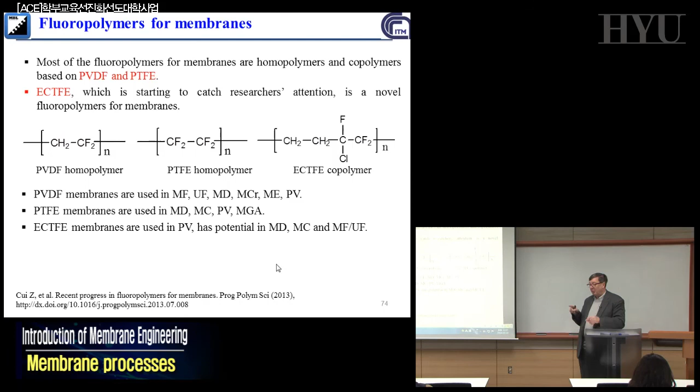The membrane plant we were discussing before. Keep in mind, some people were assuming that membranes, yes, but they are not resistant over the years, etc. Not at all. If you have a good membrane engineer who knows how to handle, who knows how to pre-treat, the lifetime of your membranes in real life can be of the order of 11 years. In the past, they were giving 1 year, 3 years. Now you can have a guarantee for 11 years of operation, which means you have to change the pumps, the tubes, the valves, the operators sometimes, but you don't change the membranes. The membranes are there.

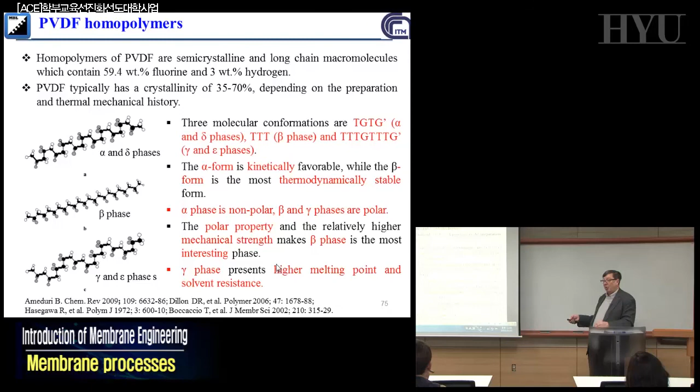For this application, the problem is different. Today, we don't have membranes that can stay for 1 year. So people have to work more in this department. There are people working also with traditional polymers such as PVDF, trying to understand better how to realize membranes that can stay a long time and, related to the polymer we are using, how to blend it. So a lot of work has to be done, particularly for the new operations, as the case of produced water, and similar, ultra-pure water for the electronic industry, etc.

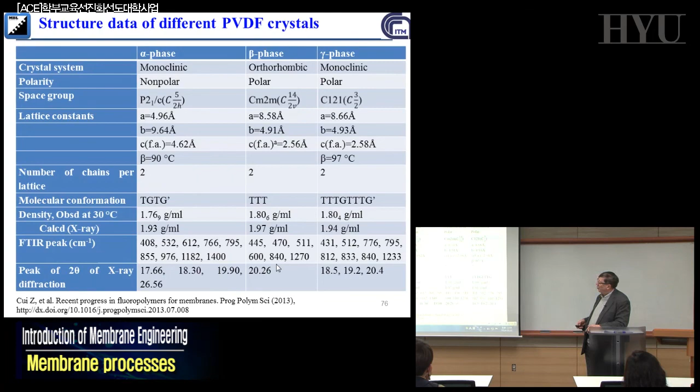And new solvents will be produced, new membranes have to be produced, with some different morphology than the traditional ones, if you want to have better processes running. You will learn that the pore size is very important to realize membrane distillation, membrane crystallizers, for example. Less important in reverse osmosis and similar.

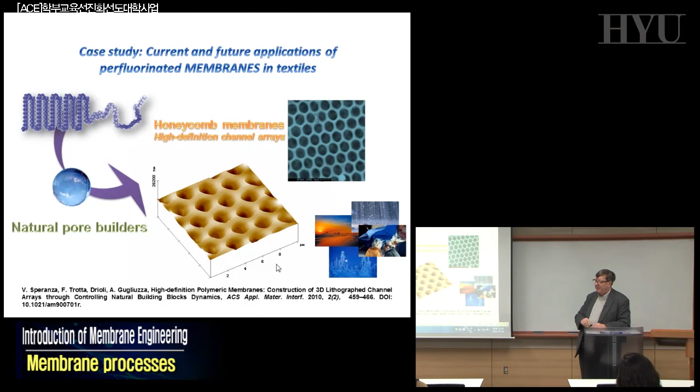Okay, we can stop here. We will meet again on Friday, and we will maybe close this, and start to speak one by one of the different processes that can be important for our future energy, water, raw materials, and a lot of industrial applications. Microfiltration, reverse osmosis, etc. Looking not only at the materials, but at the transport phenomena controlling the separation.

And what is more important, you will learn that not only membranes are important, but everything that happens on the membrane surface and in the bulk of the solution can kill your process if you don't understand what is going on. That means concentration polarization, thermal polarization, fouling phenomena, biofouling are quite important. You can have an ideal membrane that does not work if you don't keep control of these parameters, which are not related to the morphology of the membrane, but to what happens at the interface. So both things have to be done.